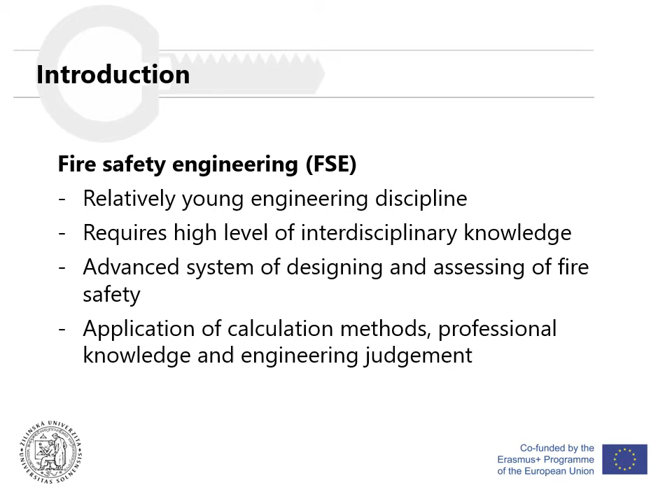Fire safety engineering can be defined in a number of ways. However, the latest edition of ISO 23932 Fire Safety Engineering defines it as application of engineering methods based on scientific principles to the development or assessment of designs in the built environment through the analysis of specific fire scenarios or through the quantification of risk for a group of fire scenarios.

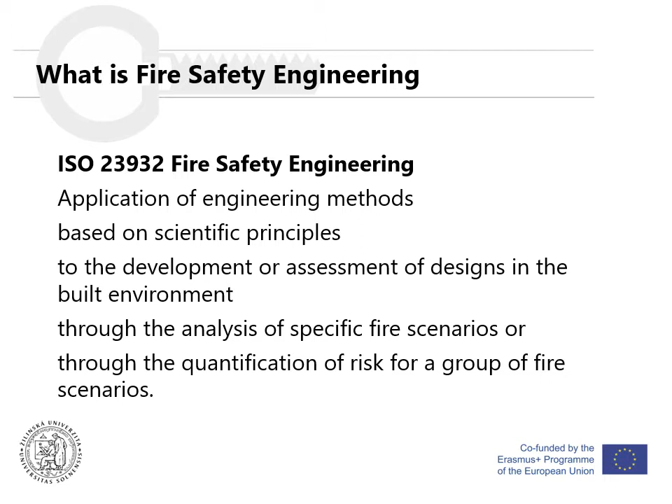When we talk about fire safety engineering, we can say that we always apply a type of fire risk analysis. There are two forms of risk expression in fire safety engineering. The first one is implicit, where the risk is hidden. That means that it's not directly expressed in our calculations, and this is usually tied with the deterministic method of fire safety engineering and application, where we use the worst reasonable case approach.

In the other form, where risk is explicitly treated and is directly expressed, we can say that we are applying probabilistic or risk assessment approaches.

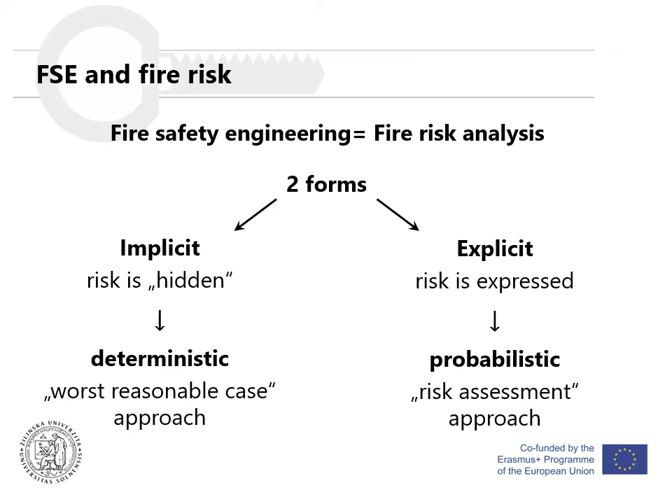When we look at the goals and objectives of fire safety engineering, it's a method of achieving an adequate level of fire safety in cases where the use of prescriptive approaches is not appropriate due to the specificity or complexity of the design at hand. That means that applying prescriptive design methods would be either difficult or not possible because of the complexity of the building or the system.

In fire safety engineering, we are not only selecting the methods of design and tools to prove that the design has sufficient level of fire safety, but we also select and define our fire safety objective, meaning that we are setting our goals for the design and deciding what is safe and what is not. Therefore, there is a risk of inappropriate objective definition, which means that we can end up applying or implementing inadequate or insufficient fire protection measures, which essentially will compromise the level of fire safety for such design.

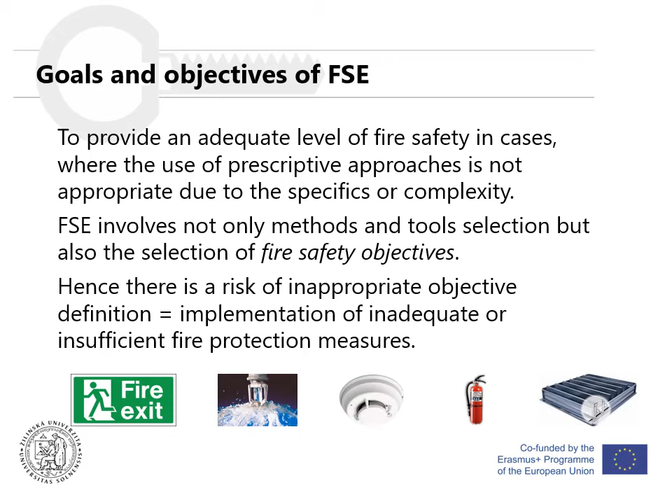The application of fire safety engineering is on the rise due to the use of modern architecture and design, which requires often an innovative approach to fire safety, and the complexity or other specific features of buildings such as high-rise buildings, atria, large open spaces, large assembly places, and so on. All of these require an advanced approach to fire safety design.

Therefore, an increasing number of countries adopt and use fire safety engineering, some of which have already developed their own standards for fire safety engineering. We have an international suite of standards, which is published by ISO with the main guidance document ISO 23932. Then another example is United Kingdom with its fire safety engineering standard suite BS7974, and also an example would be USA, which has a number of fire safety engineering related clauses in its NFPA 101.

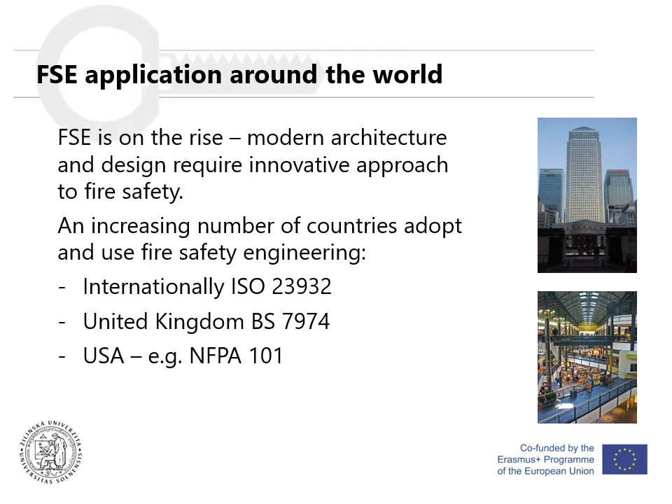ISO 23932 has developed a framework for fire safety engineering application. We can see three main parts of its application. The first part, which covers the project scope, objectives, functional requirements, selection of analysis methods, and identification of performance criteria, is called boundaries of analysis, where we set out the limits of what we're actually going to be designing with the use of fire safety engineering principles.

Then the second part, which is shown in the middle, actually means the evaluation of design through the creation of fire safety design plan, determination of design scenarios, application of the selected engineering methods, and evaluating if the selected performance criteria have been all satisfied.

Once we have proved that our design is safe and all performance criteria have been satisfied, we can then document the design features in the final report, implement it, i.e. build the building and put all systems in place.

Once the building is up and running, we have to execute fire safety management, which focuses on running all operations fire safe and monitoring any significant changes to the building, its use, or its systems, so that we maintain the required level of fire safety throughout the building's lifetime.

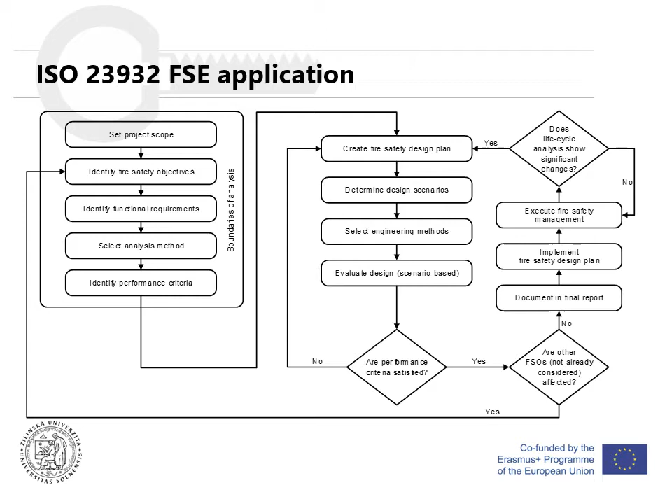When we start with fire safety engineering application, we first need to set and answer a number of questions. First, what is the objective of the construction project? Are we building a new building, changing an existing one, extending it, or changing a technology within an existing building? Subsequently, an important question is why, or even if, the fire safety engineering approach is required and appropriate—why a prescriptive approach is not sufficient, or whether the building is too complex or has specific features which do not allow for the use of a standard prescriptive approach.

What is the scope or extent of the fire safety engineering approach? Are we just justifying a number of deviations from the prescriptive guidance? Are we proving a level of safety for a very specific part of the building or technology? If it's to be applied to an entire building or a part of it, then we need to identify all involved or interested parties—for example, the investor, user, public within neighboring buildings, authority having jurisdiction, insurer, and so on. Last but not least, we need to consider whether we have sufficient information for application of the fire safety engineering approach—an in-depth knowledge of the building, its use, occupants, internal and external factors, and many more.

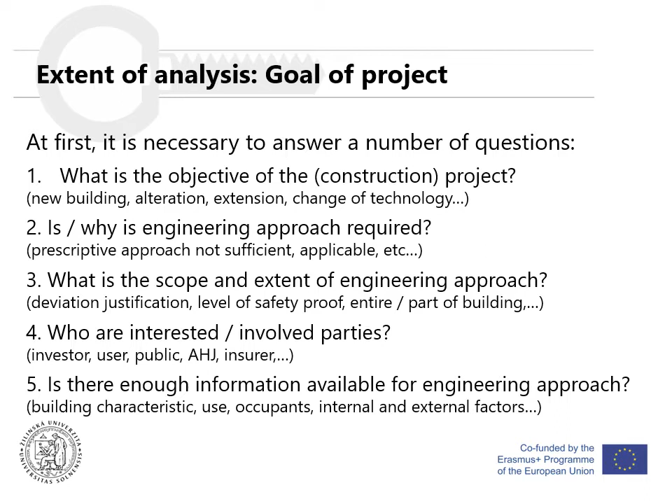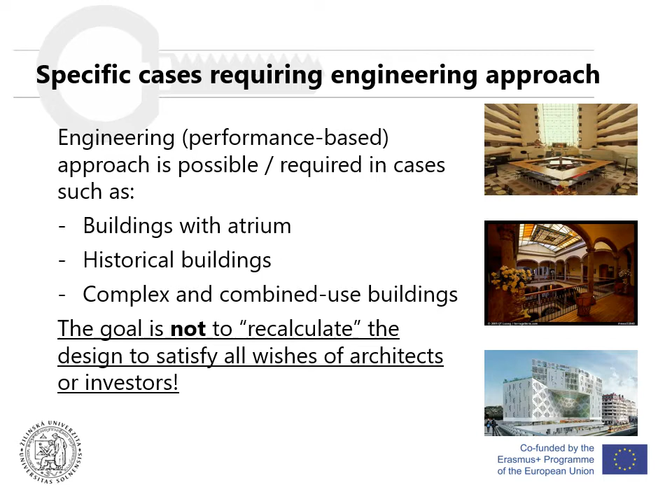As mentioned previously, there are always specific cases or building features that require a fire safety engineering approach. This is usually possible or required in cases such as buildings with atriums, historical buildings, and complex or combined-use buildings, where we need to closely investigate these specific features alone and in combination with other features of the building. We need to look at smoke spread and evacuation, and analyze these in detail. We need to realize the goal is not to recalculate the design to satisfy all wishes of architects or investors—that is, to make possible what is not possible under a standard prescriptive approach.

When fire safety engineering is applied, there is a hierarchy of goal definition which is usually applied. The high-level goals are also called fire safety objectives. Then we identify or define functional requirements, which are more detailed elaborations of the fire safety objectives. Finally, we need to define performance or acceptance criteria, which are thresholds or values that we use to prove that the functional requirements, and therefore the fire safety objectives, have been satisfied.

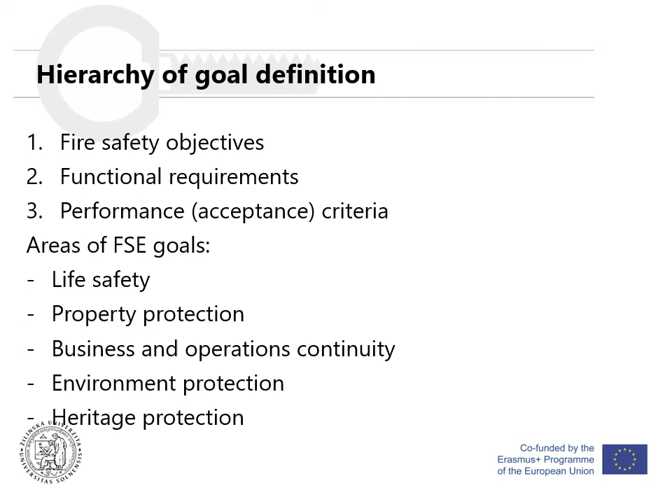We define fire safety goals in a number of areas. Most often we can divide these into five groups: life safety, property protection, business and operations continuity, environment protection, and heritage protection. We can illustrate the fire safety goal definition using a life safety example.

The high-level fire safety objective may be defined as follows: the fire safety design shall be such that fire-related injuries to occupants away from the immediate area of fire origin are minimized. That means we try to protect everyone who is not in the very close vicinity of the fire. This may then be further broken down into a number of functional requirements, an example of which may be that occupants are not exposed to untenable conditions due to elevated temperatures, radiation, toxic species, irritant species, or reduced visibility while moving along the paths of egress. This means we must protect occupants while evacuating by creating tenable conditions.

These tenable conditions are then quantified through performance criteria, which we may set as follows: the analysis method is the deterministic analysis, and performance criteria corresponding to conservative estimates are chosen.

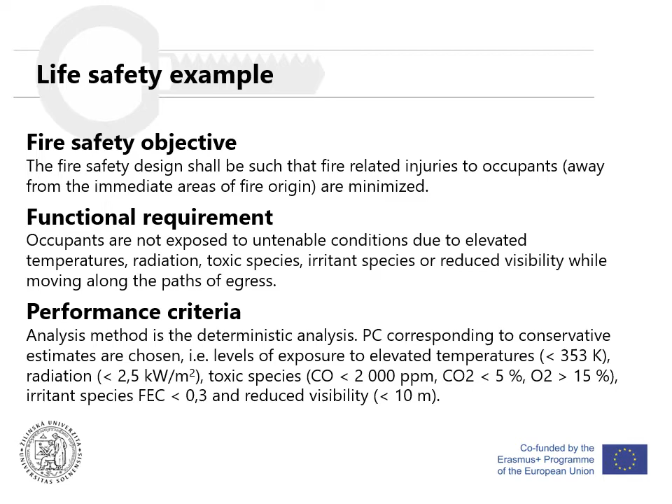The level of exposure to elevated temperatures, radiation, and toxic species are set as shown on the screen. These values must not be exceeded in our design evaluation, and if we satisfy these performance criteria, we may consider the means of escape safe for the entire duration of evaluation.

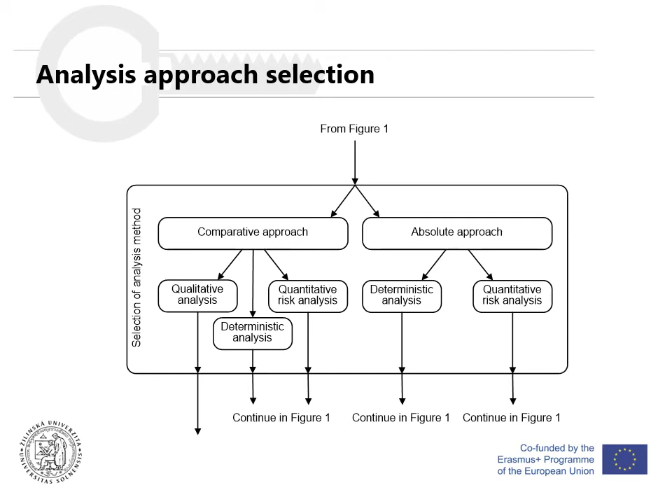The first step we need to take is the decision about the comparative or absolute approach we're going to be using in our design. Comparative approach means that we have a baseline design which fulfills all the applicable prescriptive requirements, and against this design we're going to be assessing our engineer design.

This means that we assume that fire risk is tolerable when all the prescriptive requirements are fulfilled, and therefore it's always necessary to have two designs: one, the baseline, against which we compare our engineer design.

On the other hand, in the absolute approach, we consider design acceptable if all of the approved performance criteria are met, which means that we assume that fire risk is tolerable when the defined performance criteria are met. Therefore, it's necessary to have a set of clearly identified tolerable risk criteria, and we need to express these through numerical values which are known as performance criteria.

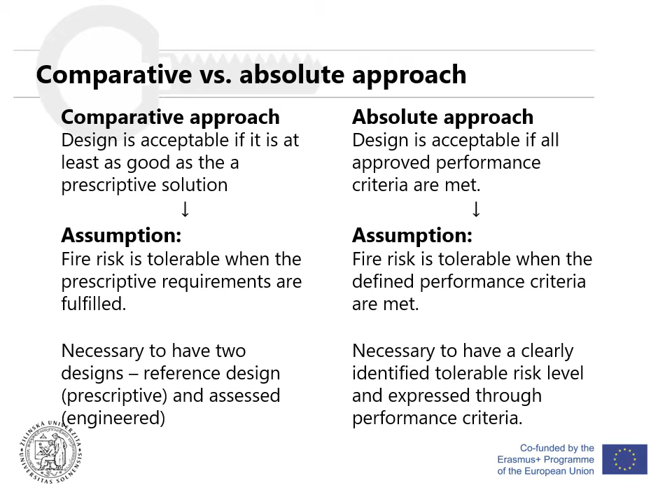Qualitative analysis is a special, simple, comparative analysis which is only applicable for small deviations from prescriptive requirements. Therefore, it's always necessary to compare our design against a compliant prescriptive design and assess if the small deviations identified have been sufficiently compensated.

Risk is treated implicitly in this case, and the deviations always have to be compensated for by additional fire protection measures. It's also necessary to assess the impact of all deviations on all fire safety objectives, even if the connection is not clear from the beginning, we always need to do this.

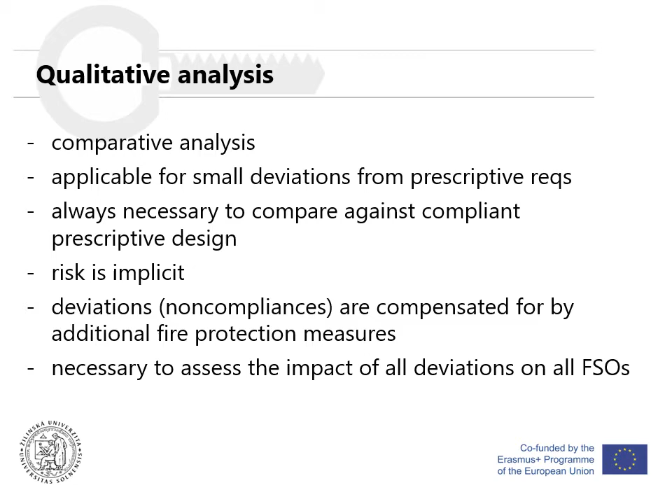This way, we always need to check against every potentially affected objective and see whether or not the deviation has been compensated for sufficiently.

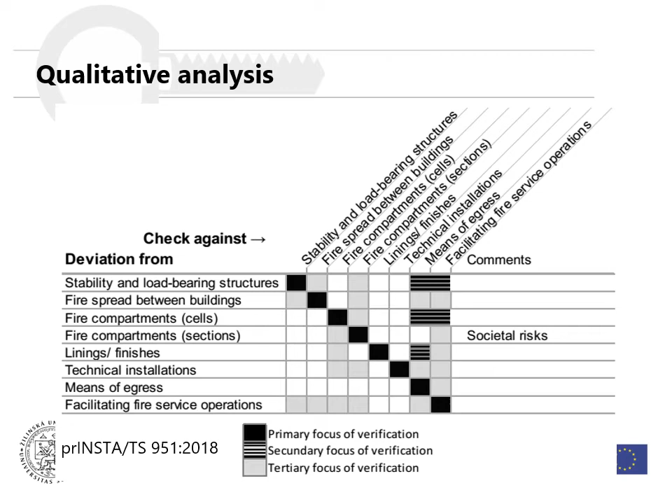The deterministic analysis is a more advanced calculation analysis. It can be used in a comparative or absolute approach. The risk is expressed implicitly by the use of worst credible case scenarios. These worst credible case scenarios are considered the potential worst situation that may occur and given a reasonable probability of their occurrence.

We therefore need to identify all relevant scenarios from the perspective of defined fire safety objective. Therefore, there is no such thing as a universally applicable worst credible case scenario, and we always need to identify worst case scenario for evacuation, for structural evaluation, for firefighting access, and so on.

We have a wide spectrum of analytical tools available, from simple calculation methods, for example, for detection and activation, all the way to the advanced computational fluid dynamics fire models.

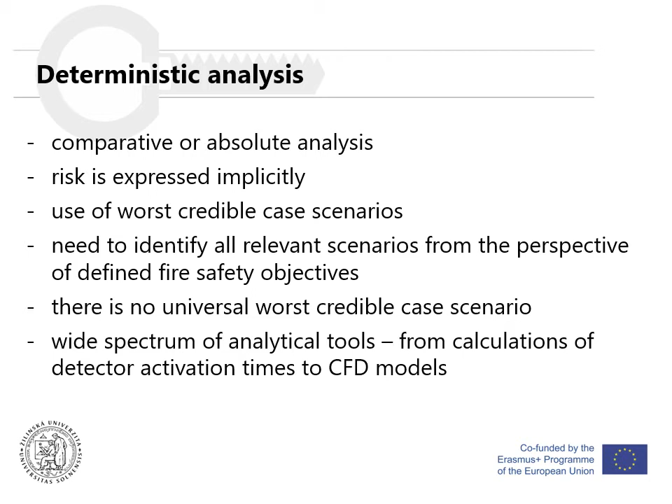Probabilistic analysis is the most advanced approach to risk analysis. It can be again used for a comparative or absolute approach, and risk in this case is expressed explicitly.

We can divide it into semi-quantitative or quantitative risk analysis methods, where the semi-quantitative methods have broader definition of design scenarios, and part of the risk is usually expressed quantitatively, and the other part or component of risk, probability or consequence, is expressed qualitatively.

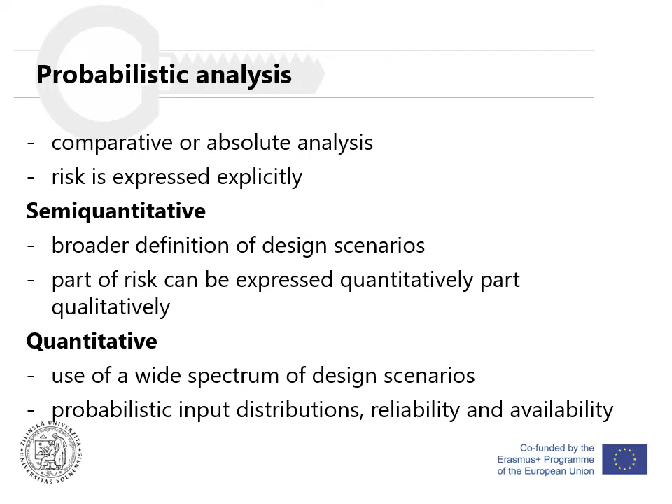Quantitative probabilistic analysis is the highest level of probabilistic fire risk analysis, and the main feature is the analysis of a wide spectrum of design scenarios, as wide as possible, and therefore we apply usually probabilistic input distributions, reliability, availability, uncertainty treatments, and the calculations are quite complex, and therefore we need to specify the limits and the scope of application of such analysis.

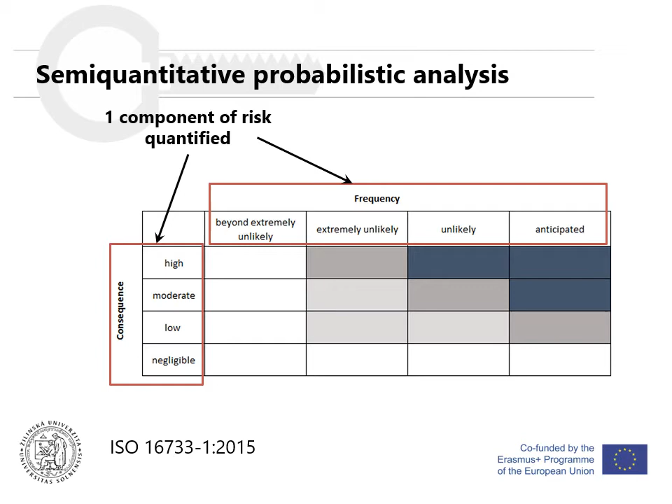This slide shows how one of the components of risk may be quantified. We change either the frequency or consequence descriptors for a numerical value, which can be either point value or a range, to which we assess a group of scenarios.

The fire safety design plan is a starting point for definition and assessment of fire scenarios. Due to occupancy and use specifics, the plan should contain information and design elements in a number of categories, shown as follows: fire initiation and effluent production, fire and effluent spread, constructions and compartmentation, detection, activation and suppression, occupant characteristics and evacuation, and firefighting action if relevant.

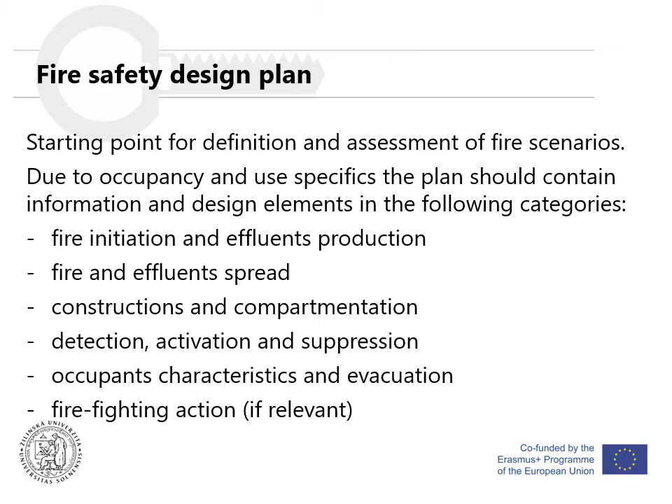All of these will be used in formulation of our design scenarios and evaluated at a later stage. There are two categories of design scenarios: one concerning fires, we have design fire scenarios, and the other one concerning humans and their behavior, which we name design behavioral scenarios.

For design scenario specification, the first step is fire hazard identification, where the following specifics are considered: internal, which comprise building occupancy type, processes and activities, construction and materials, equipment and furnishings, systems and technologies, fire protection and other systems; and external factors, which usually comprise neighboring buildings, environmental hazards, and other factors that may affect the development of the design fire scenario from the external perspective.

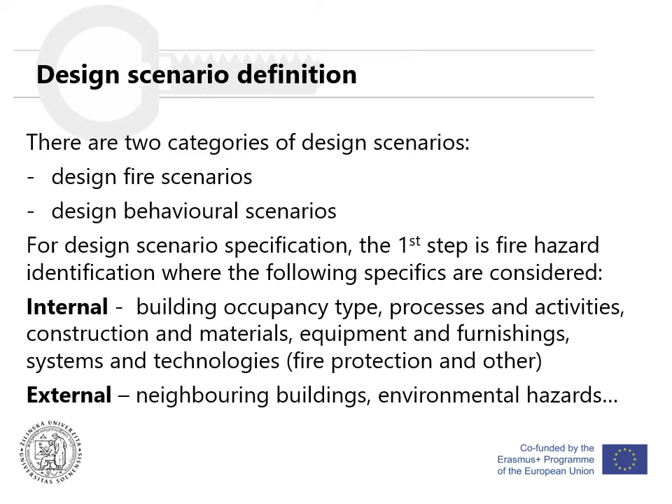In this figure, we may see the process of fire hazard identification. Part of the hazards can be addressed through prevention and the other part through mitigation measures. The hazards are divided in chronological order, from even before the fire starts, then ignition and fuel hazards, enabling hazards which may worsen the fire conditions, and vulnerability hazards, which concern the vulnerability of people, structure, and other parts of the design or the exposed targets which may suffer from fire.

Subsequently we can arrive at the fire impact, i.e. outcomes, which is usually characterized through injuries, property damage, business interruption, or environmental damage.

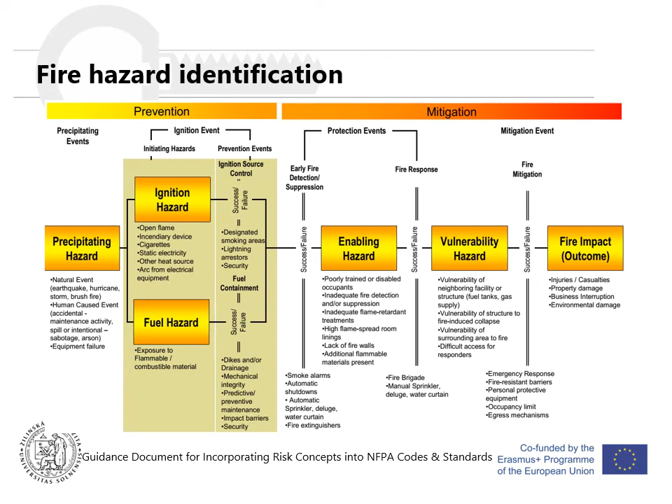Fire scenario definition is a two-step process. In the first step, we describe our fire scenario qualitatively. This is described in ISO 16733 Part 1, and it concerns identification and characterization of the aspects affecting fire development. So we put together our fire scenario as a number of steps involving fire-enabling and

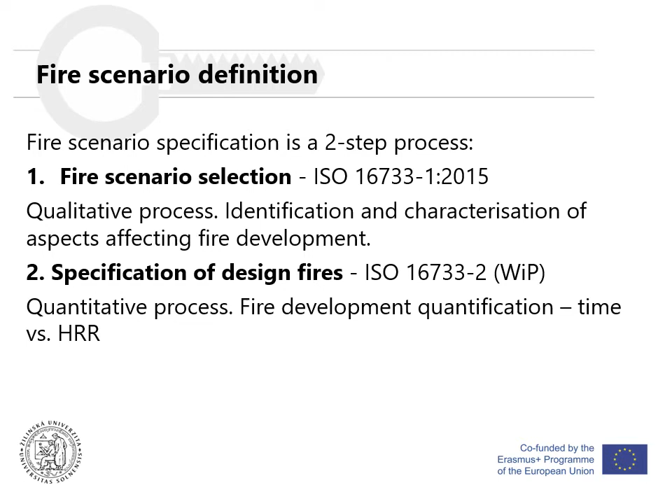fire-bearing elements that will then create our fire scenario. In the second step, we have to specify our design fire, which is the quantification of our qualitatively described fire scenario. This means assessing or attributing a specific course of development of heat release rate or temperature profiles with time. This procedure is described in ISO 16733 Part 2, which is currently under development.

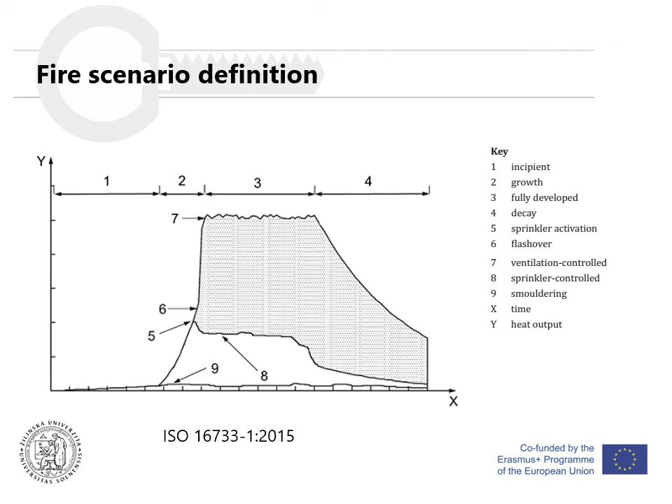Behavioral scenarios, on the other hand, are concerned primarily with persons and their behavior in fire conditions. ISO Technical Report 16738 from 2009 recommends considering the following elements.

Primarily persons, from the perspective of their number and distribution, whether these people are awake and familiar, and what their mobility is, how they will evacuate from the building, if they need assistance, what the expected movement speed will be, and so on. And also the building systems that may promote or affect the evacuation.

This means, for example, the detection and alarm system, fire safety management and training, and spatial configuration, which may either help or complicate the evacuation depending on the actual configuration. And also the fire scenarios, meaning fire development and effluent characteristics - that is, concentrations of toxic gases or smoke produced, and their impact on visibility and walking speed reduction.

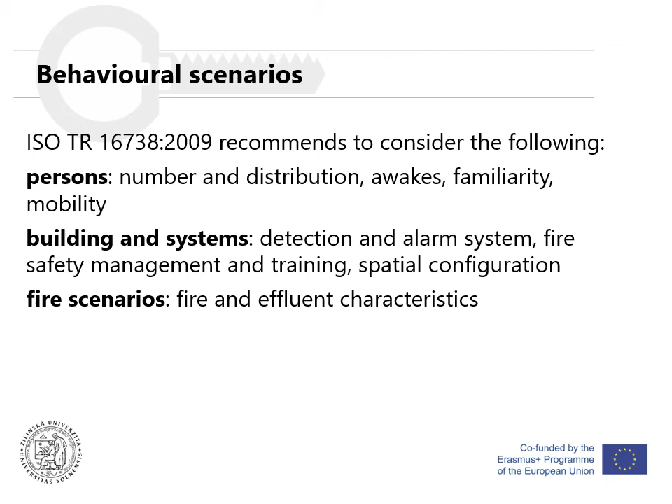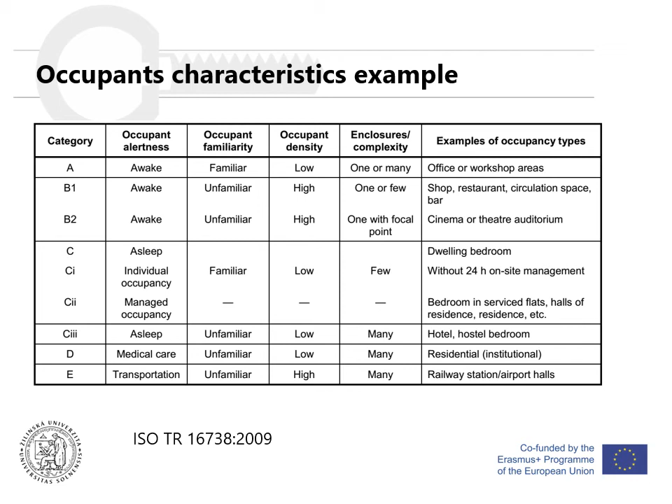As mentioned previously, we have a number of tools available in fire safety engineering, ranging from simple hand calculations through computer models, probabilistic studies and calculations, and experimental methods, which may all be used for evaluating different parts of a fire safety engineering design.

This doesn't mean we will always use the entire range. It depends on the complexity of the jobs we have to do, as well as appropriateness, ease of use, necessary simplification and approximations, compatibility with the defined fire safety objectives, and other factors that affect the applicability of these different tools.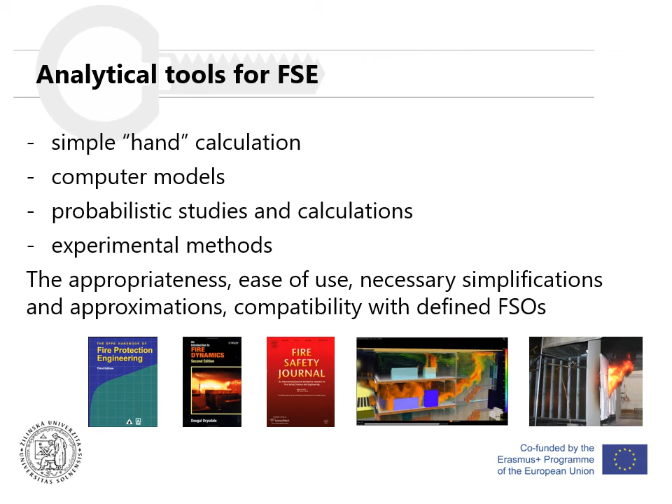You can also see a number of examples of books, journals, computer models, and experiments that may be performed as part of fire safety engineering.

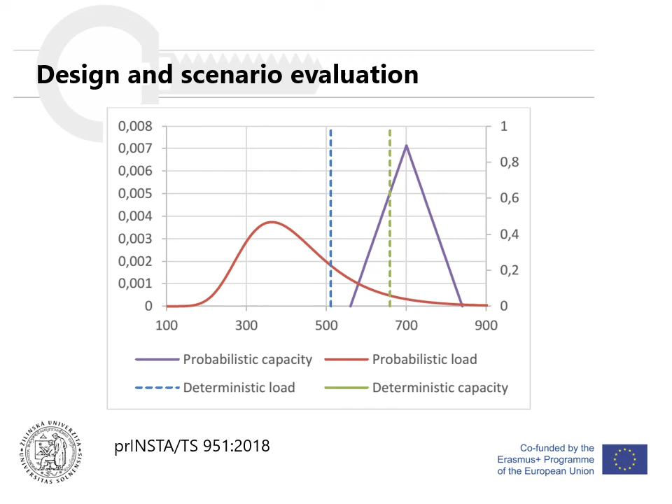Once we have evaluated all our design scenarios and proven that all fire safety objectives, functional requirements, and performance criteria are met, we can move to documentation of the fire safety engineering design. Here we need a detailed approach, providing all necessary information in the right extent and format. That doesn't mean putting everything into one document—it needs structure and must highlight the right amount of information in the right places.

We always need to describe and justify why such conditions and input parameters have been used, what they mean, and how they affect the overall level of safety.

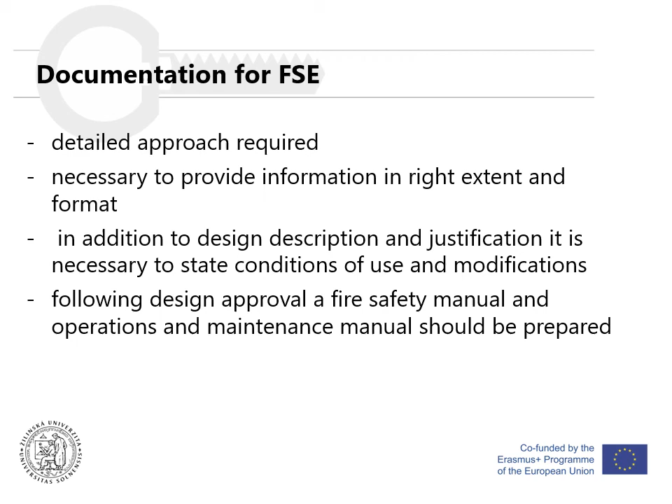Once our design is approved, we can move to creating the fire safety manual and operation and maintenance manual, which are the base documents for the actual lifetime of the building, for its use and fire safe use. The final step in fire safety engineering is the implementation and fire safety management of our design.

After the building or system has been constructed and installed, it is necessary to check the functionality of the individual fire protection systems and features, individually and in combination, to prove that the design as a whole is functioning properly and performs all required functions. We therefore need proper and thorough testing before handover to ensure that before the building or technology is open and running, everything functions properly.

Subsequently, we need to employ a sound inspection and maintenance program to constantly check that all our systems and fire safety features are in place and performing as required. We also need to keep our fire safety documentation live and up to date, monitoring and recording all changes and modifications.

This is particularly true for fire safety engineering designs—changes must be properly consulted with a fire safety engineer and assessed in the context of their impact on the overall design, because even a small change may significantly impact the overall performance of a fire safety engineered design.

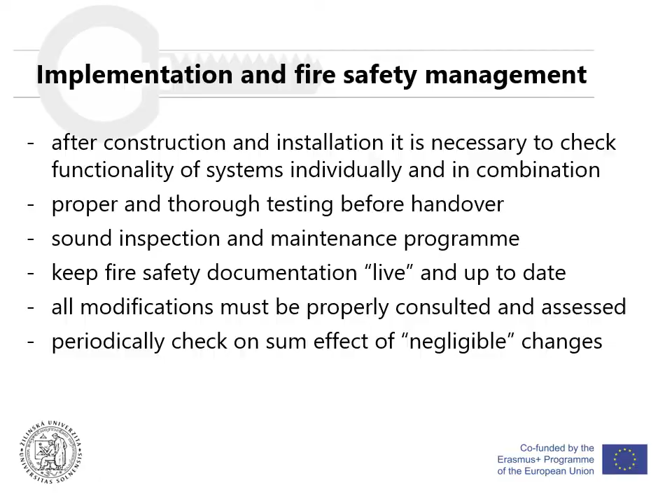We also need to periodically check the sum effect of so-called negligible changes, because a number of small or negligible changes added together may constitute a significant change and invalidate our design significantly. This concludes the presentation about the application and principles of fire safety engineering, and I thank you for your attention.